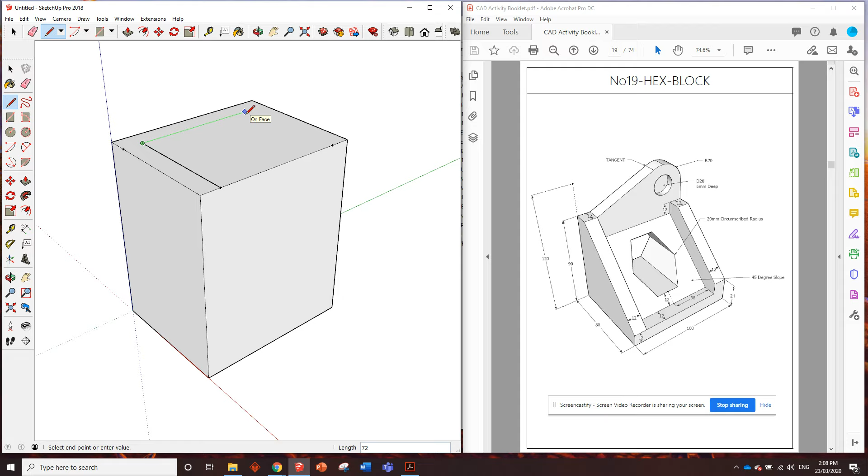We can hold down shift, get it lined up with that guide point again, click, and then click. So see we've got that C shape.

Now we need to remove the center part down until there's 12 millimeters left, like we said earlier. It says it over here on the drawing. So we'll go from the bottom, measure 12 millimeters up, click on this surface here, and drag it down to that guide point. There we go, looks pretty good.

So let's get started on, say, this left slope. I think there's enough information to get started on that.

We know that the top of it is 90 millimeters up, and then the top of the slope is 12 millimeters in from the back, and it slopes down. The bottom of the slope just comes right to the edge, 12 millimeters up. We've already got a dot there at 12 millimeters up.

All we need to do is grab the tape measure. We'll put in the 90 millimeters up. There's our guide point. 12 millimeters in. And then I reckon we could just do a bit of dot to dot. What do you reckon? There to there to there. If we push that in, I think it'll stop us at 12 mil.

And we'll just need to use the eraser to get rid of that line and that line. There we go. That looks like that slope's pretty well done.

Okay, we can't really do the back because we need to do a circle, but it's blocked by this wall. So we might need to do this wall. And to do that, we're going to need to measure off the top of this slope, off the top of that 45-degree slope. So let's put that slope in.

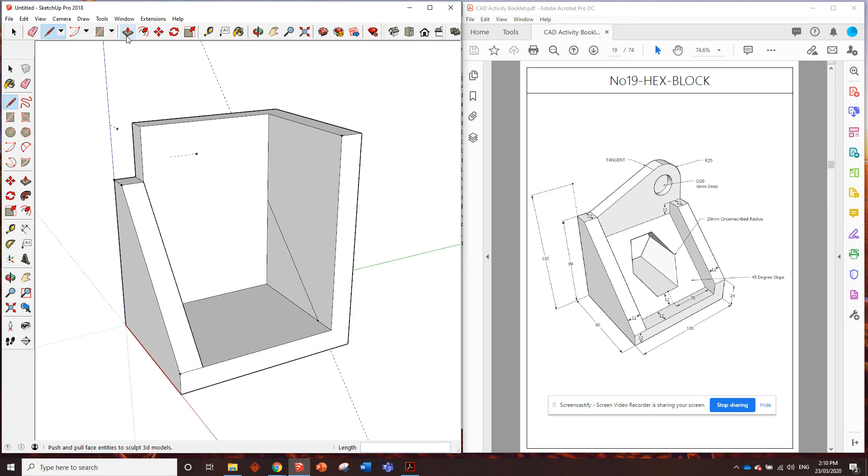We want to type in 45, enter. And there's our 45-degree slope. So if we just trace that dotted line from there to the intersection, we can then pull that point away from there and get in the slope.

All right, so for that back wall, we need to find the top of the slope, which is 12 millimeters there, and you've got a flat spot of 12 millimeters. Then the bottom of the slope is 24 millimeters from the bottom. We know that that is already 12 millimeters thick, so let's go another 12 millimeters from here, which will add up to 24.

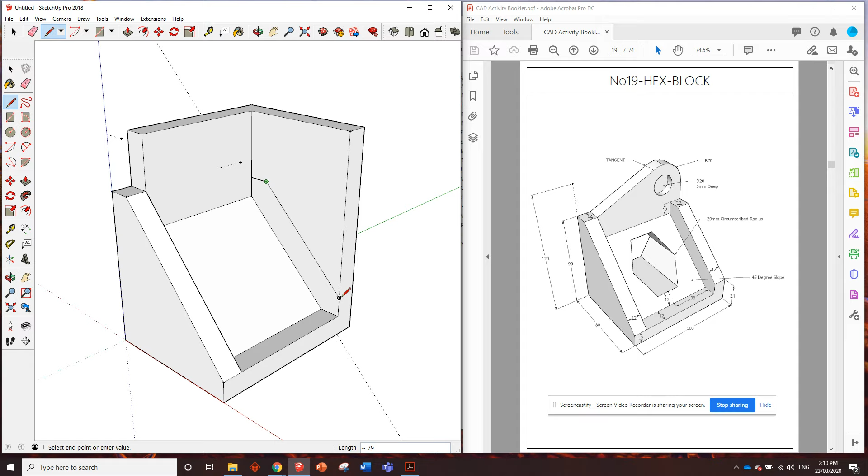Seems like everything in this drawing is in multiples of 12, isn't it? 12 and 12. Again, I think we can just play dot to dot with the pencil. Dot to dot to dot. Right? And then if we push this wall away, look at that.

That is looking pretty well ready to put in that radius up the top there, or that sort of half circle. So we can see the information about that. The radius is 20. We'll worry about this hole later. And the slope meets it at the tangent point.

So when we lay it out, first thing, we need to find the center point of the arc. So that'll be 20 down and 20 in, and that's the center point of the arc. We'll grab the arc tool. We're on the red face, that's good.

We can't just click, click, and stop there at a quarter circle because the tangent point won't actually meet it there. The tangent point will meet somewhere around here. So just to be safe, let's draw a half circle. Then we can put the bottom of the slope starting over here at this point. And if we zoom in, we'll have to just check where our tangent point is.

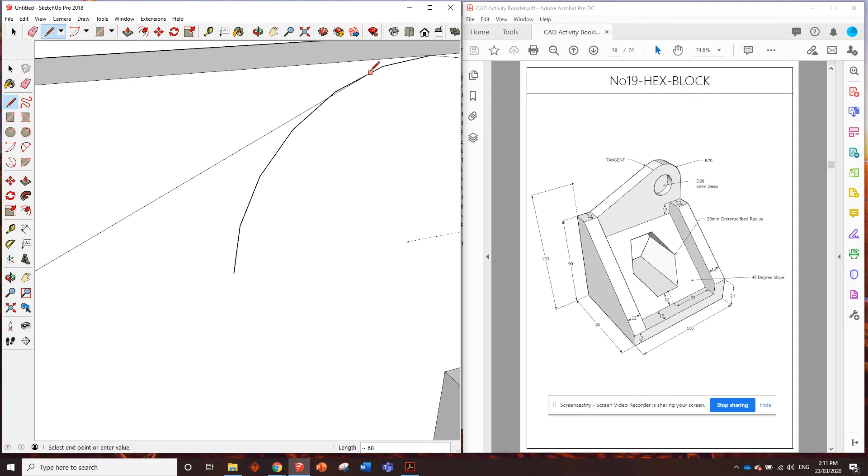So we can go higher than that, maybe higher than that. Nope. See, if we go to the next point, it starts cutting through the circle, which would indicate that that there is our tangent point. Anywhere further, it starts cutting through the circle. So that there's our tangent point. We'll click there. We can use the eraser to erase that line because we don't need it.

And we can use the push-pull tool to get rid of that and get rid of that. Okay, looking good. Now, we'll just get rid of this little circle here. That's a diameter of 20 and 6 millimeters deep.

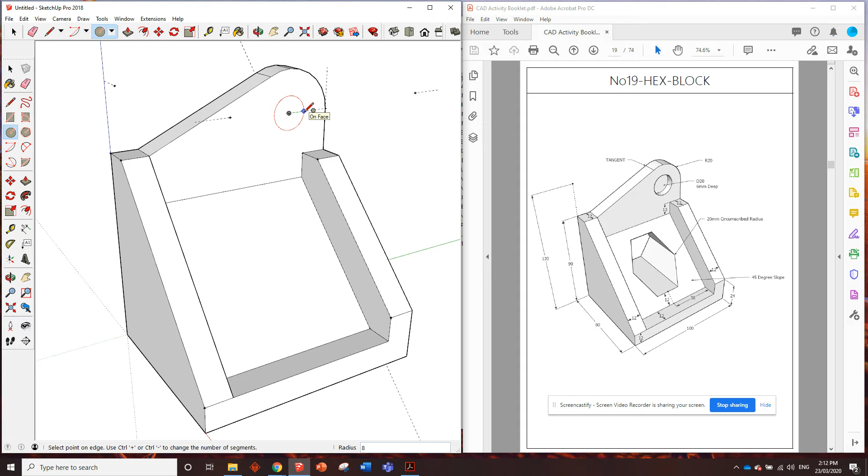So grab the circle tool. If the diameter is 20, then the radius will be 10. Good work if you guessed that. Now, we'll push that in. How far to say? 6 millimeters.

Pretty good. All right. Now, okay, we've got a 20 millimeter circumscribed radius for that hexagon in the middle. See this hexagon we've got to remove? That's a 20 millimeter circumscribed radius. Now, this is going to have to be another solid tool subtraction removal to get rid of that, which can be a little bit of a pain, but you know, we'll figure it out.

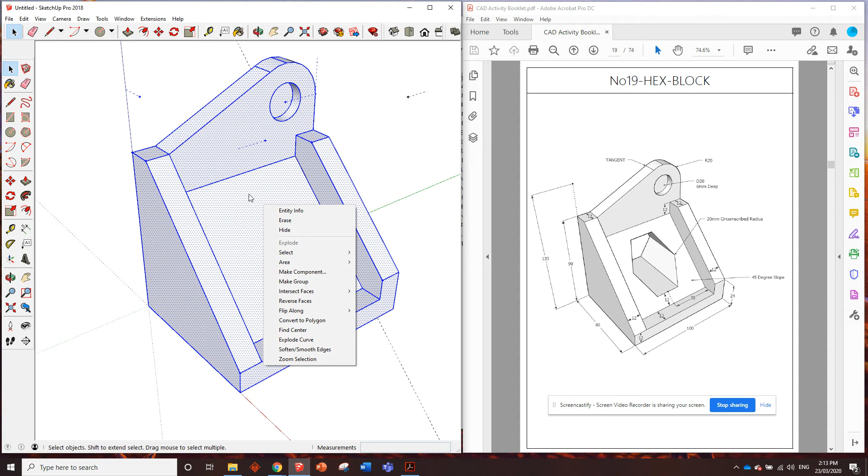So what we're going to have to do, we're going to have to make this a component similar to we did in an earlier drawing. So if we highlight that, right click, make component. So that's a solid bit. Then what we'll do is we'll make a, I guess you can call it like a hexagonal cylinder. And we'll put, if we put that through the shape and then remove it from our original model, that will leave us with that sort of hollow hexagonal bit.

So first of all, we have to lay out where the circumscribed 20 millimeter circumscribed radius hexagon is. Geez, that's a mouthful. So we can see that it is 12 millimeters up along the slope and 38 millimeters in from the edge. So 38 millimeters in from here, we'll measure our guide point.

From here, if the line goes purple, it means we're going along the slope, so that's good. Type in 12. Now I'm not going to pretend I know the difference between a circumscribed and inscribed radius on a hexagon.

The tool we're going to want to use is not the circle tool, it's the polygon tool over here. If we use this polygon tool, the first thing you need to do is enter the amount of sides you want your shape to have. I think it automatically defaults to 5 sides to draw a pentagon, as you can see down here. Mine is 6 because I've used a hexagon recently, but all you have to do is type in 6, enter, and then you're drawing a 6-sided shape.

So I'll show you the difference. If I click over here and start drawing, see how it's telling me I'm using an inscribed radius? That's the length from the center of the hexagon out to one of the corners. Whereas if I hit Control, it changes to a circumscribed radius, giving me the measurement from the center to the middle of one of the edges. So we're using this one, a circumscribed radius. We need to hit escape to get out of that.

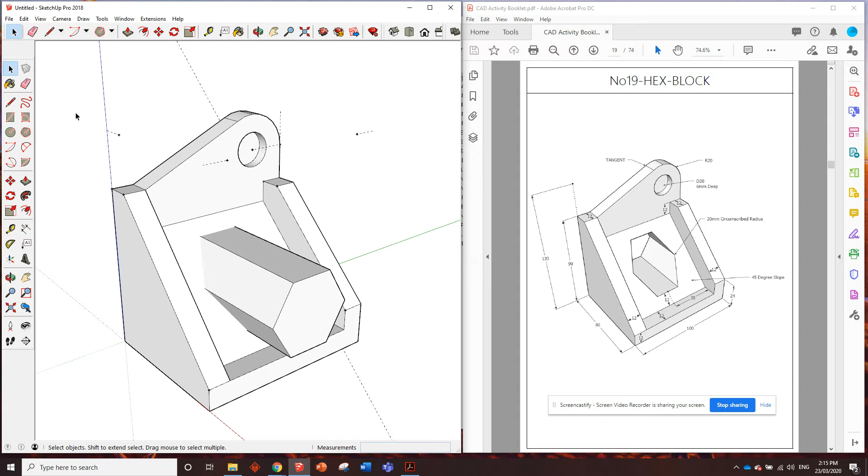It might be a bit tricky to highlight this by clicking and dragging because we might accidentally highlight this other part. So quick trick: if you triple click, it highlights the whole thing. Then right click and make component. Component number 2 is fine.

There we go. Now my solid tools are hidden over here, so I'll grab that and widen it up a bit. Oh sorry, I'm covering the drawing, but that's okay. That's the tool we want to use, the subtract tool. It's going to subtract the first solid from the second and keep only the result.

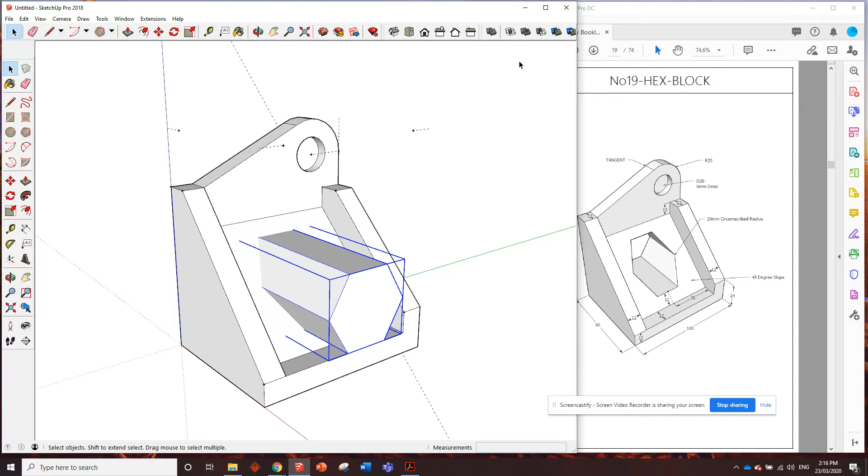So that's the first solid, which I want to subtract from the second. I'm going to click on that tool, click on my second solid, and boom, look at that. That is one good looking number 19 hex block. I think that's all done. Can you see anything I missed? I don't think I missed anything. That looks pretty good. Cool.

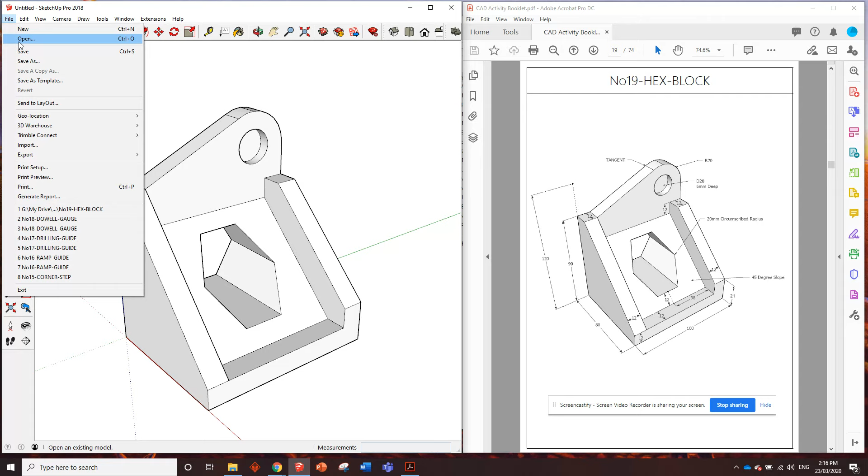So what do we do? Edit, delete guides, and then we save it. So we'll go File, Save, find your folder, My Drive, CAD Activities, and we'll call it number 19 hex block.

Yeah, perfect. Okay, we'll go File, New, and look at this, we're on the last one for this series. Isn't that exciting? So number 20, pivot bracket. I'll see you over there.